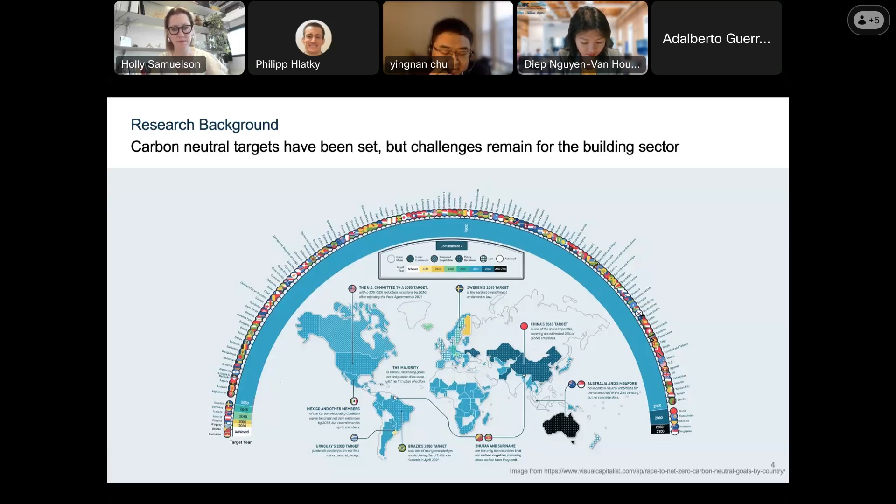Currently, most countries have already claimed carbon neutral targets towards 2050 or 2060. In the building sector, demonstration buildings achieving net zero have been seen in most countries technically, but how large amounts of buildings could work towards that remains a challenge. Edge has a lot of experience in emerging markets and understands deeply this challenge in the complex social, economic, and climatic context. So it is still worth rethinking the definition of net zero to understand how this changing concept would bring opportunities and challenges to the real world.

Different countries and cities are all trying to develop or upgrade their building standards and building codes to allow the large amount of buildings to join in this decarbonization process. So by learning the detailed how these standards are set and understanding the specific requirements within these frameworks could offer valuable insights for other countries and cities in marking the similar path.

And this analysis can be especially useful for cities just starting their decarbonization efforts, helping them better understand potential strategies and future decisions.

Another important point is that the building sector has a strong connection with the country's overall energy plan and building budgets, and the relationship between these can be quite complex.

When we plot the energy generation per capita and the grid carbon intensity, we can see from this chart, especially for these emerging market countries, some of them may have quite green grid, which is powered by hydro. But at the same time, they may not have enough energy consumption, and due to climate changes, some places even suffer electricity shortage in dry seasons.

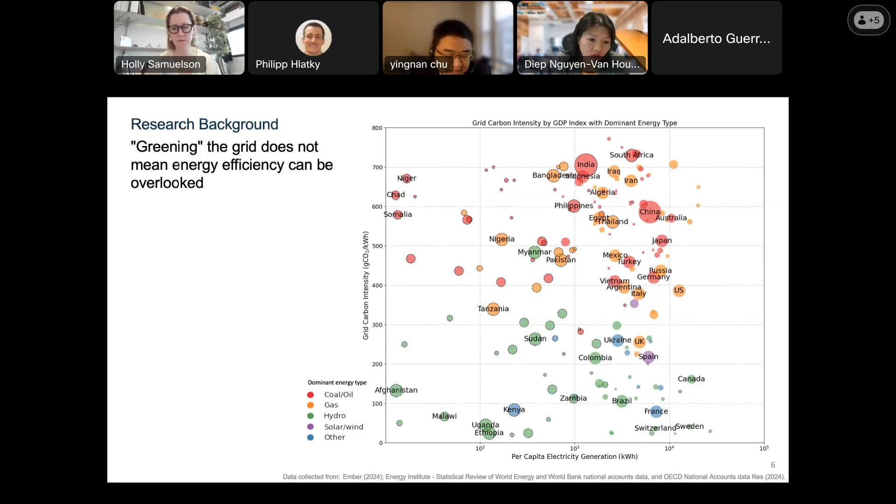And this clearly means that a cleaner grid does not necessarily mean that building energy efficiency can be ignored. The interplay between grid decarbonization and building energy use is intricate at this point.

In addition, achieving carbon neutrality involves more than just meeting targets within individual buildings. New tools and broader concepts are developing, trying to address this complexity.

For example, ISO 14068 introduced a carbon neutral aligned concept. If a sector's actual carbon is traced annually or year by year, it could allow reduction credits or a kind of reduction plan towards its final target of net zero. Within this path, it could be defined as carbon neutral aligned.

This approach expands the definition of carbon neutrality and enables broader participation, making it possible for more buildings, especially for retrofits or projects that cannot achieve the final target directly, to join the decarbonization path.

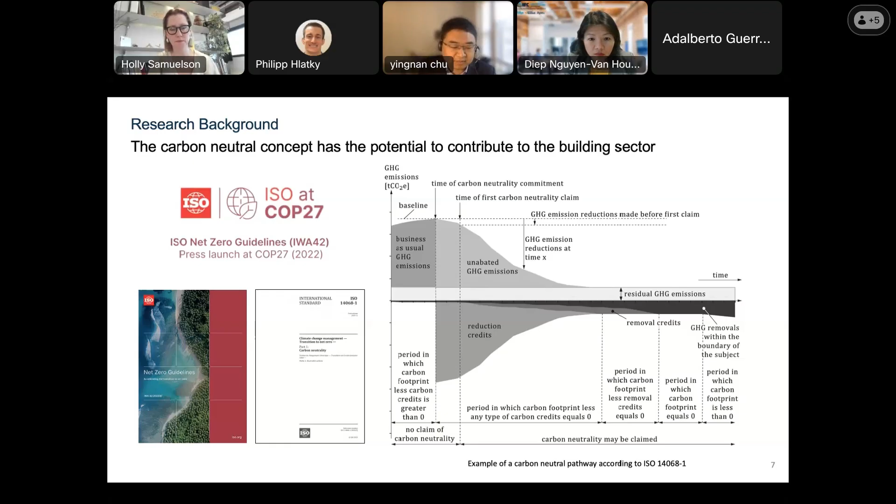So, facing this changing world, our research objective is to evaluate this definition, to analyze the trend and the concept behind this, and trying to identify the implication and opportunities for wider impact of carbon neutral targets, including the emerging markets.

Our work is divided into three parts. First, we're trying to deeply review the recently published net zero carbon related standards to understand how these principles are changing and what are the key features.

Second, we're trying to collect data from real world cities and make comparisons about these key metrics to understand how strict these targets are and how challenging they were to the emerging markets.

And third, we're trying to collect a series of interviews from experts to really understand how these changes and concepts may impact a practical situation.

The first part is about reviewing all the standards. We're trying to understand how these concepts of net zero are evolving. These are the six standards that we are mainly involved in.

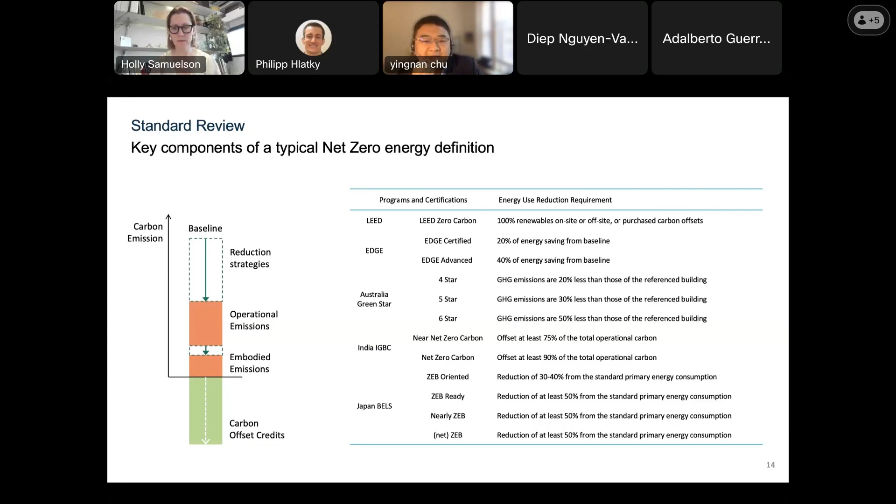But for these new standards, the first thing clearly is they set clear requirements for fossil fuel usage, which means the encouragement of electrification. For example, the US national definition and Chinese standards both mention that on-site and off-site should not use fossil fuels; the building should only be powered by clean energy. The UK standards clearly require not using fossil fuel on-site, while district heating or other off-site requirements will be managed in other related standards.

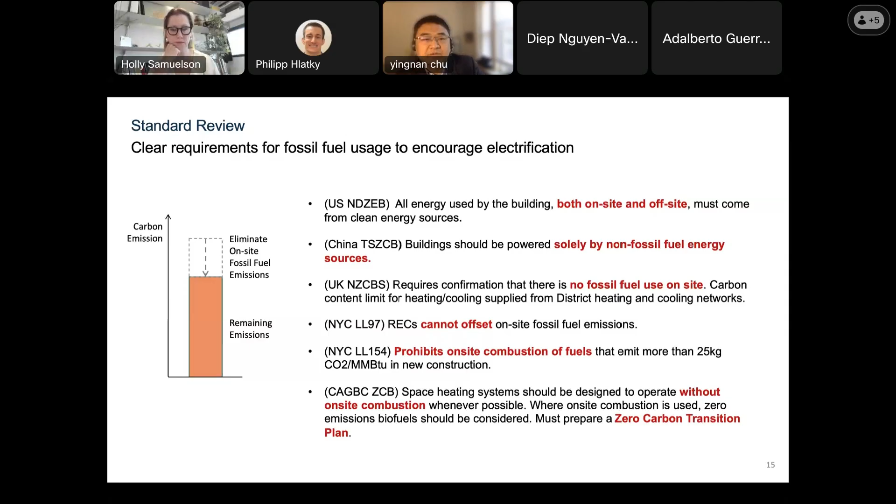Similar things go for New York City. The proposed Local Law 154 prohibits combustion-related fuel usage in the future. For the Canada standards, they also mention trying to eliminate on-site combustion, but they propose another option of a zero carbon transition plan, meaning in some cases you cannot eliminate it directly; you could make a plan to eliminate it in the future, and your actual work should be traced. So we can see from all these standards a clear trend of eliminating on-site fossil fuel emissions directly, which could define net zero carbon buildings.

The second key change is the embrace of this benchmarking approach. Clear thresholds are set based on this benchmarking approach for building energy efficiency. We can see in all 6 standards a clear metric based on different building types and different climate zones, set as the upper limit for all operational energy emissions to be followed.

There might be slight differences. The first line, these 3 standards, as discussed before, are mainly performance-based standards, meaning you have to submit your actual operational data to get certification, so these figures should only be matched with operational data. But the bottom part accepts both design and operational data separately, meaning these figures could be achieved using simulation models and simulation data, which seems to be slightly different.

Another slight difference is that ASHRAE 228 emphasizes not directly setting limits on the building's own energy; instead it sets the maximum procurement of off-site source energy, which is another way of trying to set a limit. Local Law 97 sets caps for carbon emissions, directly regulating the carbon emission of different types of buildings. So we can see all these standards clearly trying to set up clear limits or thresholds for building energy efficiency apart from other connections.

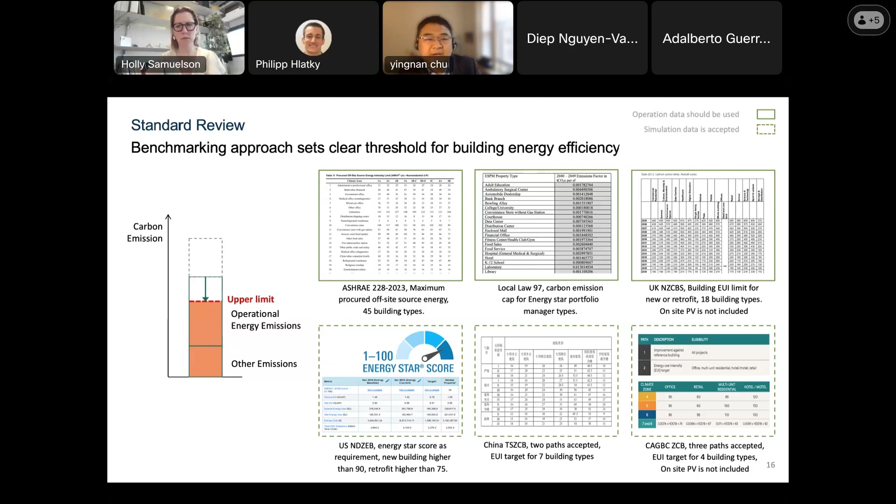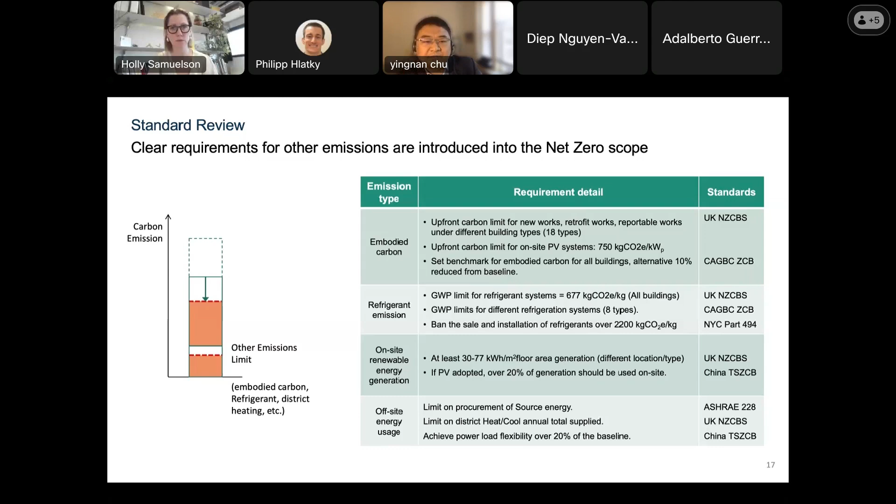As to the carbon offset credits and the renewable energy certificates, we can see there's always a discussion of how to take advantage of this and how it is useful. We can see in recently published standards, there are standards trying to control or limit the use of carbon offset credits.

For example, the U.S. national definition clearly mentions do not accept carbon offset. Similarly in the UK standards, they do accept the offset, but they understand the offset as something else, as an asset. They are not included in the basic certification framework.

Well, the New York City's Local Law 97 and ASHRAE also set limits on the maximum you can get from carbon offset. On the other hand, the importance of...

using the renewable energy certificates is addressed, and in most standards, they address that for electricity use you could use renewable energy certificates to balance the actual emission of electricity use, and also the bundled REC should be used to make sure the electricity is generated and used exactly for your project.

So when compared with our traditional understanding or the previous concept, we can see briefly the trend of this definition changing. First, of course, eliminate the direct fossil fuel use on site. Second is try to identify the performance targets to address energy efficiency separately. The third is to also include other limits for building-related emissions, maybe including embodied carbon, refrigerants, or district heating, etc. Another thing is reduce or avoid this reliance on carbon offset credits.

When we go into detail on these document settings, we can see how these documents are developed, trying to support these main changes. For example, in most of the standards, the annual operational data should be tracked in order to maintain this certification process. In order to achieve certification, you have to submit 12 months of operational data to fulfill all the requirements.

And also New York City's local law and UK's standards, and also Canada's performance-based standards, according to their requirements, the certification is only valid for 1 year, and you should update your actual performance annually to keep these standards valid.

And the UK, because the UK system included the upfront carbon sector, they also developed some methods on how to integrate this embodied carbon into the annual submitted information, and how to make the embodied carbon regulated similar to performance information of the buildings.

And based on that, we can see the importance of building identification is improved. For example, in the UK's standards and also in New York City's local law, the unique reference number of each building is addressed or targeted to make the application of the standards.

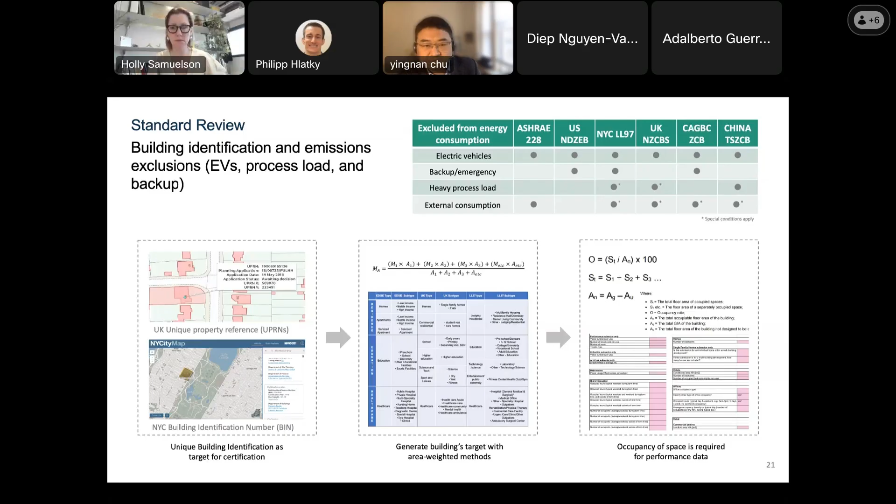And also, because all of them are carbon-related standards, they are trying to clarify how different types of energy use are converted back to the building itself, which means the responsibility behind this complicated system should be clarified. For example, in most of the standards, how the distributed energy sources should be calculated back to building, how the energy storage emission is calculated, how the combined heat and power, biofuels, energy from waste, and even hourly time of use electric emission is calculated, will be clarified.

Special mention about New York City's Local Law 97, because it is mandatory for most buildings within the city. So they have put a lot of effort into clarifying different types of energy use. For example, we can see in the bottom series diagrams proposed by the New York City local government, how different types of energy distribution systems, for example the central plant or combination with electricity load, and how different energy distribution systems in each situation calculate the energy use, and in what situations the sub-meter should be placed in order to achieve this calculation.

From the previous slides, we can feel this trying to make strict requirements on this emission, but at the same time, we could find certain levels of flexibility within these rules or requirements. They work a lot trying to allow a wide range of buildings to be aligned with this. For example, the Canada and China standards mostly contain design and performance phases.

So you can use the simulation data to fulfill the requirement, and the performance data does not need to fulfill the figure requirement—only the report is required in this situation. And there are also accepted different ways to fulfill this target, either benchmarking or energy saving percentage, or even other strategies based on their own country's building code and workflows.

As to the UK standard, you can see in the details that they are trying to exclude certain types of room. For example, they mentioned that currently certain building types have the district heating and cooling requirement excluded because of the lack of data.

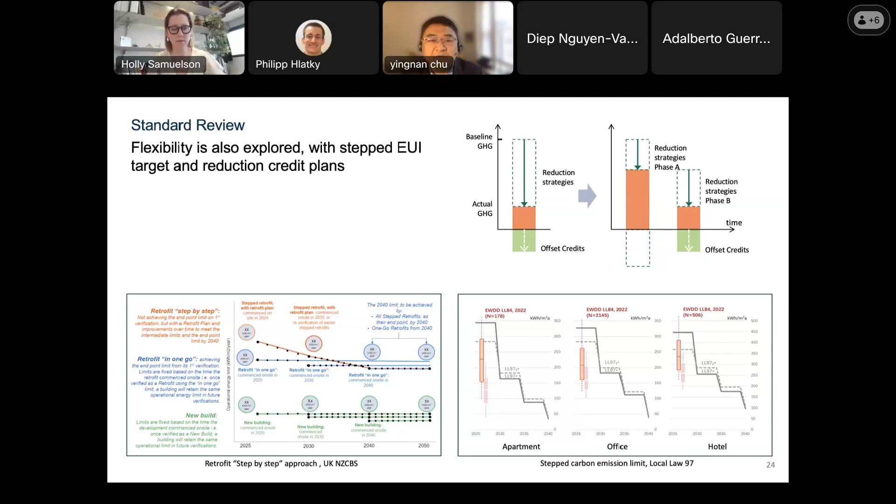After reviewing all this information, we could feel on one hand these standards are getting strict. Multiple pass and fail requirements are set on emissions, apart from the traditional carbon balance of emission and carbon offset. Also the performance metric is tracked annually with benchmarking to make sure the actual emission of the building will not exceed a certain level. At the same time, they're trying to make more flexibility, for example accepting certain types of energy consumption in special contexts, and creating a step-by-step pathway to conduct retrofits. So we could somehow feel this trend of how to achieve balance between this new concept, trying to balance within the benchmark context to manage all types of emissions and gain a new balance within these new definitions.

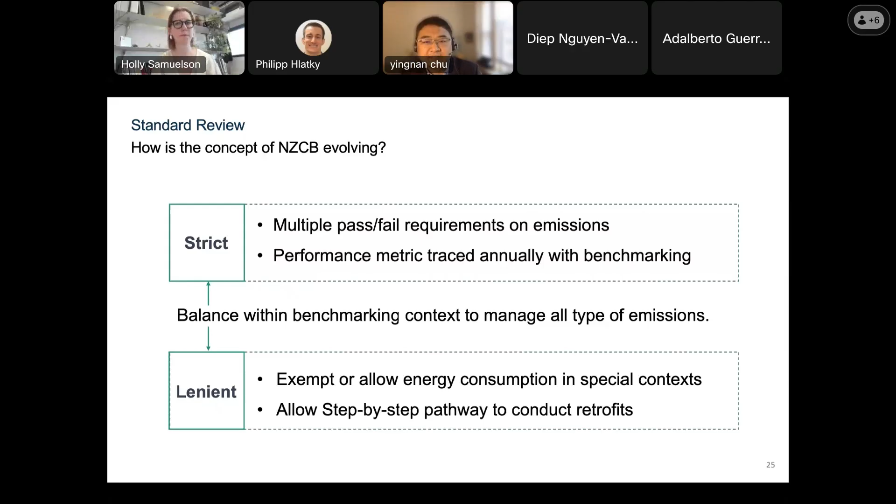The second part is about metric comparison, because clearly the performance-based target, or building energy efficiency, is the key figure required for buildings according to this effort. So we are trying to understand how these figures are set and how they may impact the actual building in the actual situation.

We're trying to collect data from different cities. For US, Canada, or even UK cities, we could use publicly available city-scale building datasets to plot the actual building energy use of different cities. But for emerging markets, there's currently not enough city-scale data, so we try to collect information from government reports and research papers to demonstrate their basic distribution of these different energies.

We also have a chance to collaborate with EDGE. We could use the EDGE system because EDGE provides a series of calculation systems for most cities within the world, and within its own cities these targets have already been normalized and have a certain level of comparison. So we are trying, based on the ASHRAE target, to make a comparison of different cities to understand basically how these impacts are.

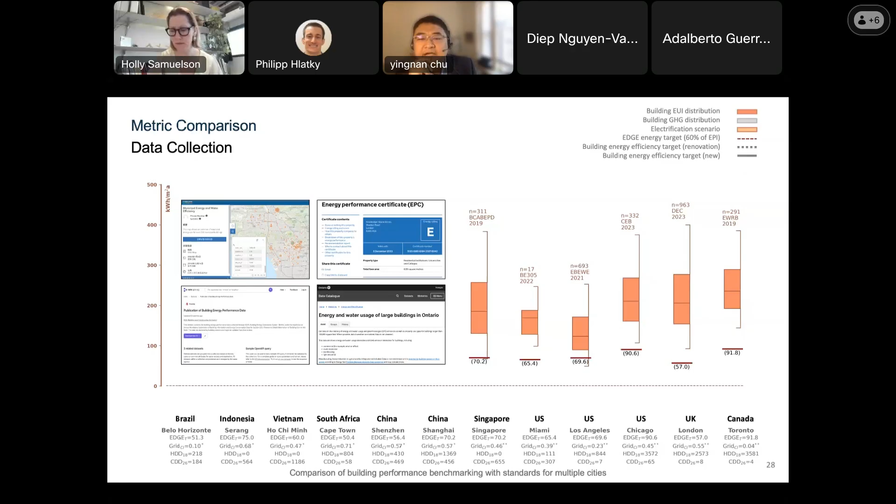For the US and UK cities, we could download directly the information of each unique individual building and plot them directly in this chart of operational energy use. For example, this chart shows office buildings for each city, and the dark red line here is the EDGE energy target, which is 60% of the baseline case.

For the emerging markets, we're trying to collect information from public government reports or research papers to also make a basic comparison of these standards. Currently we collect data from Vietnam, South Africa, Indonesia, etc.

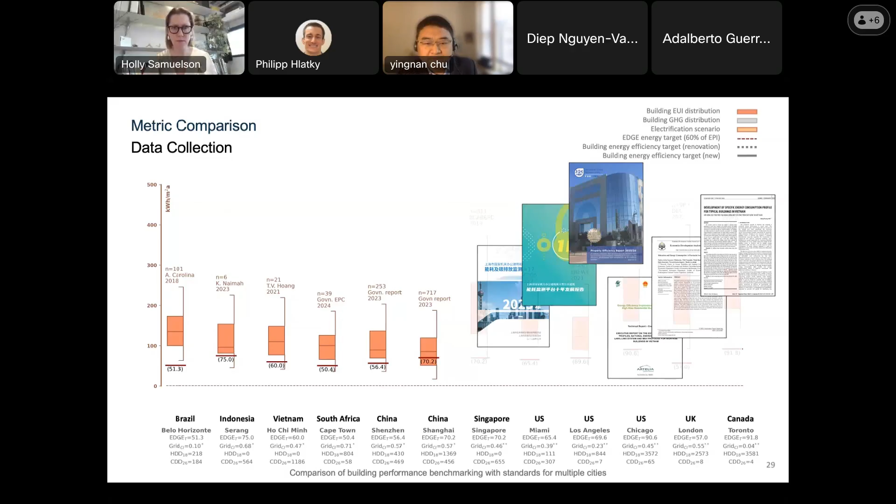So when we plot all these 12 cities together, we could somehow start this comparison and understanding of how these standards are required. We'll try to use the EDGE target to make an alignment—you can see this dotted line. If we align all the EDGE targets directly, we could compare each city's energy distribution, whether it's higher or lower than EDGE, and what the trend or difference is compared to this target.

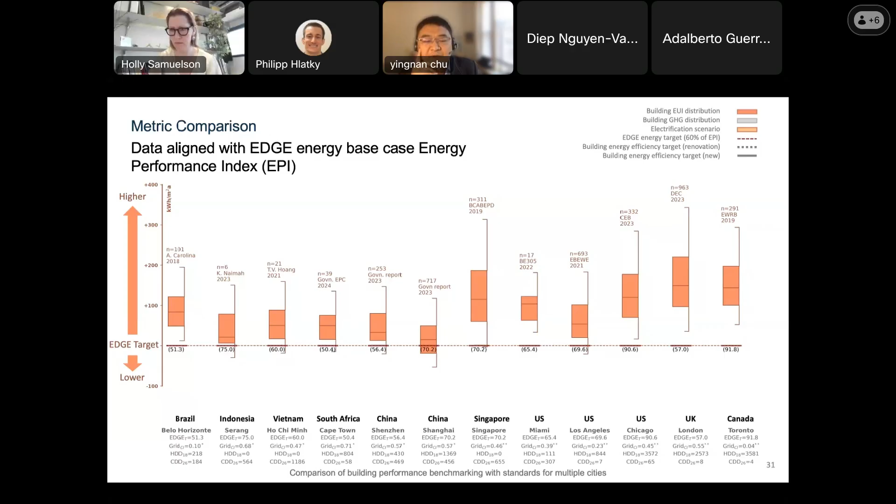For example, in the Brazil situation, most of the city is about 80 kilowatt hours higher than the EDGE target. While in the Shanghai situation, maybe 20% of the buildings currently perform lower than the EDGE target, 20 kilowatt hours lower than the project. This comparison may not be precise between countries, but considering the baseline has an alignment of climate and behavior, we could have a basic comparison to understand the connection between the simulation data and the real world distribution as a concept.

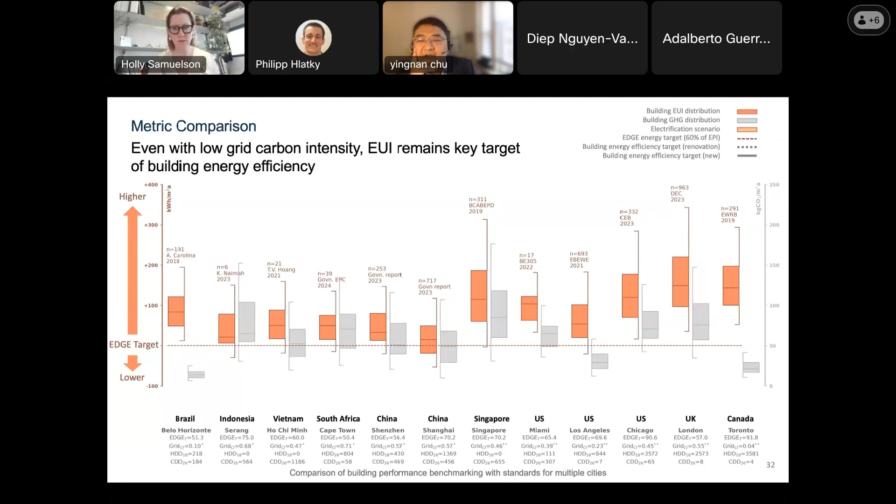When we plot the carbon emission information of this situation, we could clearly see that, for example, in the Brazil or Canada situation, or even Los Angeles, they may have a green grid, so their actual carbon emission from building operational energy is quite low compared to others. But again, as discussed before, the requirement for building efficiency is focused on energy use intensity or energy use itself. So no matter how green the grid is, the building's own efficiency should be addressed at this time.

So within this framework, we plot different standards' requirements on the same chart. Again, this is the office building category.

Briefly, for example, the UK system, you can see there's a diagonal slope. They set different requirements for operational buildings based on different years, which means currently they have a relatively higher level of requirement, but in the future, about 2050, the requirement of actual emission is quite strict. They set up this metric to guide their own country's decarbonization process.

Chinese standard also proposed a benchmark, but they separately propose a large office and a small office, so there are two requirements for new buildings in the office sector.

South Africa currently does not publish a national government level clearly defined target for net zero building definition, but we could see some government-based supported reports that discuss how strict or what the energy efficiency should be. So currently we reference a report, Getting to Zero 2020 guide, to see their vision and understanding of this EUI.

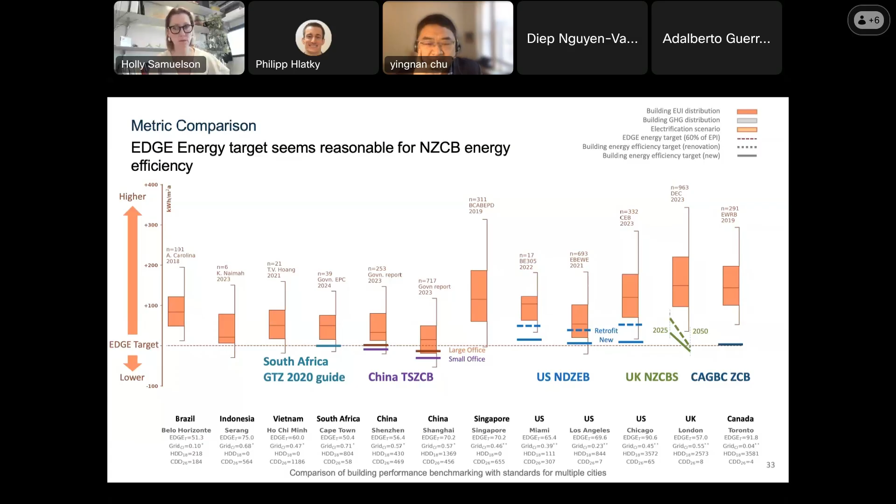We go into detailed comparison of this, because most of the standards address the importance of electrification. When we calculate the electrification scenario of different cities, we can see clearly how these targets are set related to the existing buildings.

Electrification process may lead to a reduction of the energy use intensity, which may reduce the strictness of achieving this target. And also at the same time, different standards may have different regulations on how to calculate this energy use intensity.

For example, in the Canada and UK situation, and even South Africa's report, the on-site PV is excluded from calculating this emission. Well, in the US standards and also Chinese standards, the on-site PV is included. So this means for different types of office buildings, they have different types of challenges.

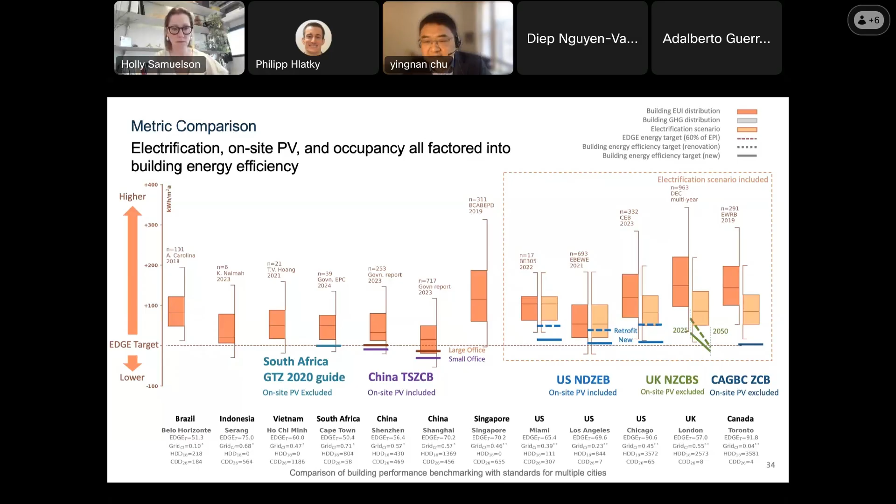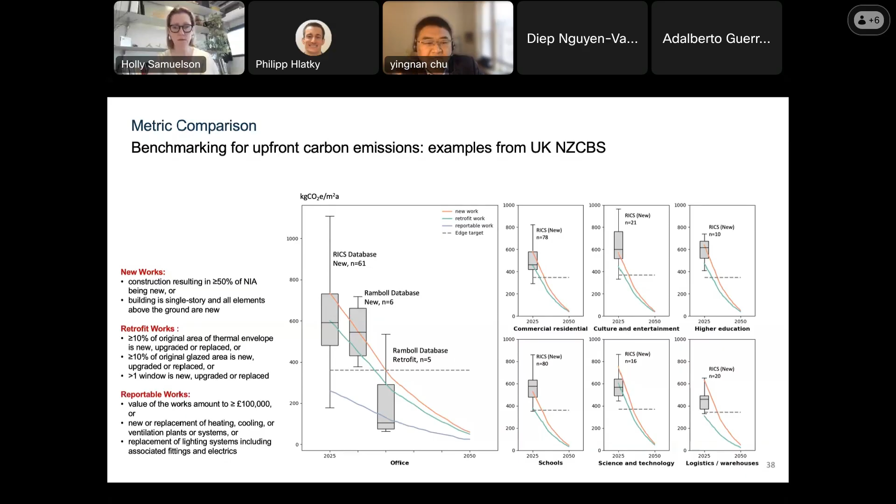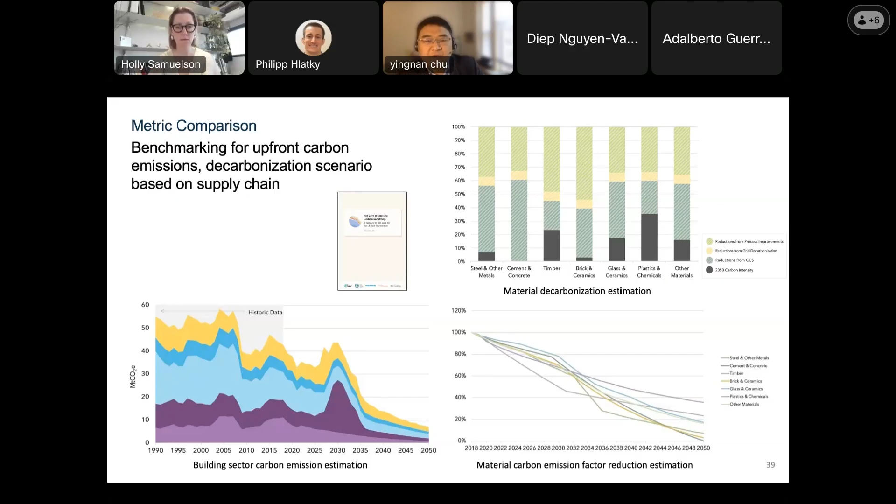When we go into detail reading this decarbonization roadmap, we could somehow understand how they are expecting a strong relationship between this embodied carbon decarbonization process and the supply chain. In the left chart, you can see the estimation of future renovation projects around 2030, and maybe lower construction after that. But in the right chart, you can see the estimation of different parts of materials and how they could achieve decarbonization in the future. So it means there's a strong connection with the supply chain in this sense.

After going through all these figures, we could realize the simulation target, benchmark metrics, and performance behavior present a really complicated situation with connections between each other. For office buildings, the EDGE energy target could be used or seen as a reasonable target to define energy efficiency for net zero energy buildings, even toward the future. But at the same time, for hotels or others, performance-based targets would have more advantages because they have a better connection with the real world situation.

At the same time, emerging markets tend to have lower energy use intensity, but it does not always mean higher efficiency. Because we can see across different types, there's a detailed relationship with how the building type is divided and how the area is calculated. So this means benchmarking and performance targets should be examined in detail, case by case, in different sectors.

Also, embodied carbon benchmarking is currently practicable and possible, and addressing the reduction strategies seems to greatly depend on the supply chain.

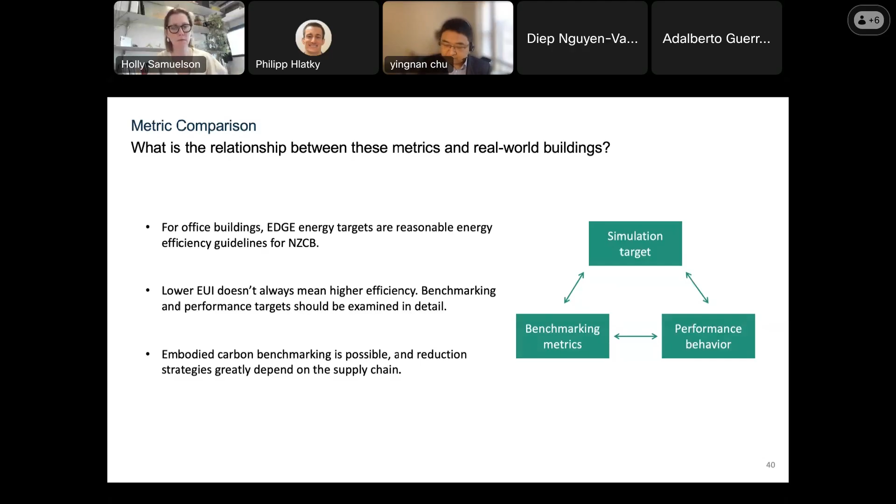The third part is we're trying to conduct a series of interviews with experts, to understand better how these changes and concepts will impact practical situations. Thanks to EDGE's global think tank, we have a chance to connect with experts from both emerging markets and China. Currently we have conducted interviews including Vietnam, India, Colombia, and others, over 13 experts. It is an ongoing interview process.

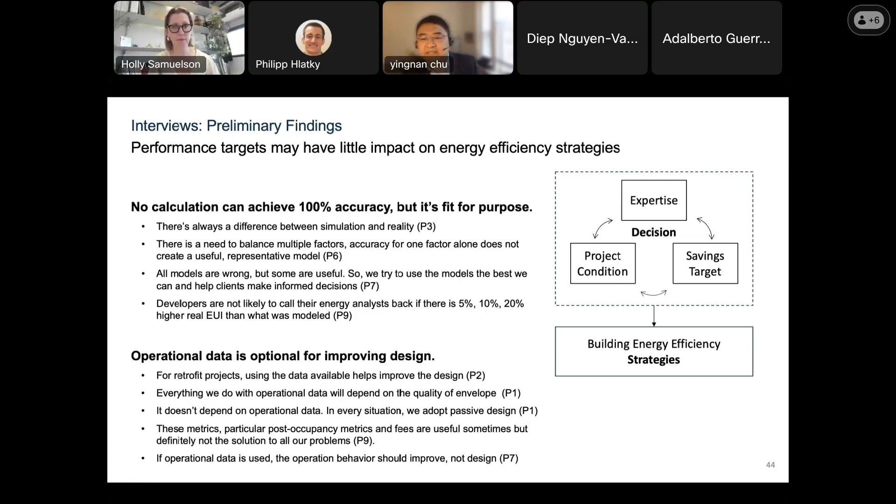The operational data could be used to improve the simulation and other tools, but not radically change the decision-making process. But after detailed analysis of this discussion, we realized the performance data really try to define or expand our understanding of energy efficiency, because they have a better connection with the actual performance of the building. In terms of EUI or related figures, it's easier to make comparisons. So during the whole design and construction process, the target itself is more clear for all sectors related to the building.

At the same time, it raises another consideration of how to take advantage of this performance information. Experts mentioned that if we have a better understanding of the uniqueness of performance behavior, we could select better or more suitable energy efficiency strategies designed for this specific pattern of use. In this case, it really expands building energy efficiency to a performance level.

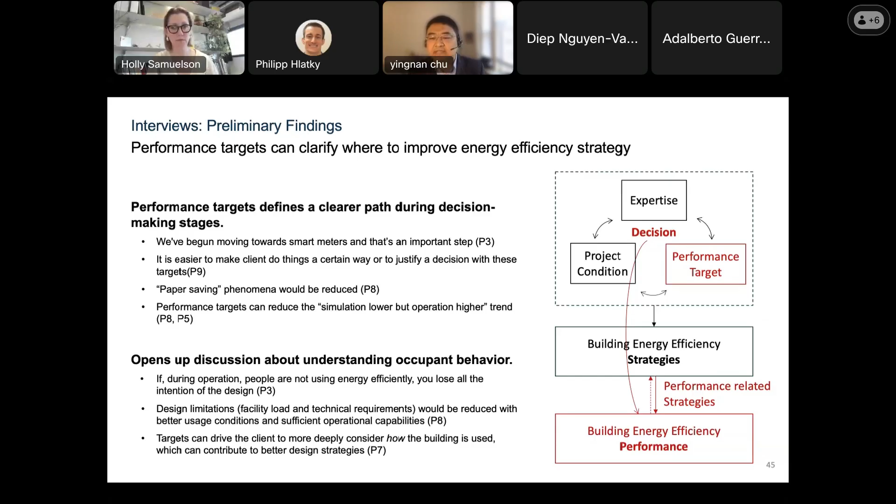As to the pathway concept or step-by-step concept, currently the concept itself sounds good. Most experts mentioned that for emerging markets, most projects cannot achieve all the decarbonization strategies at once. So if there's a pathway or a chance to make different plans, it will be much easier for them to follow. But it also addresses the importance of ownership, because the plan makes a strong connection between current use and what the future pathway is. So the ownership or responsibility behind that is also addressed.

Technically, we realized how to take advantage of this concept is really a case-by-case situation. For example, in our discussion, there are cases where similar clients face different situations. They have to figure out different strategies to take advantage of this step, either floor by floor or facade by changes. So it really depends on how this concept is understood and how it could be combined in the real world situation.

As to embodied carbon, currently emerging markets do not have enough data to open the discussion of embodied carbon. So at some point, detailed connection with the supplying industry to open up discussion about embodied carbon seems important to start this process. At the same time, we realize in project decisions, embodied carbon tends to not be set at the first level of priority. So how to integrate this embodied carbon reduction strategy into the overall decision-making process will be beneficial to make real progress of reduction.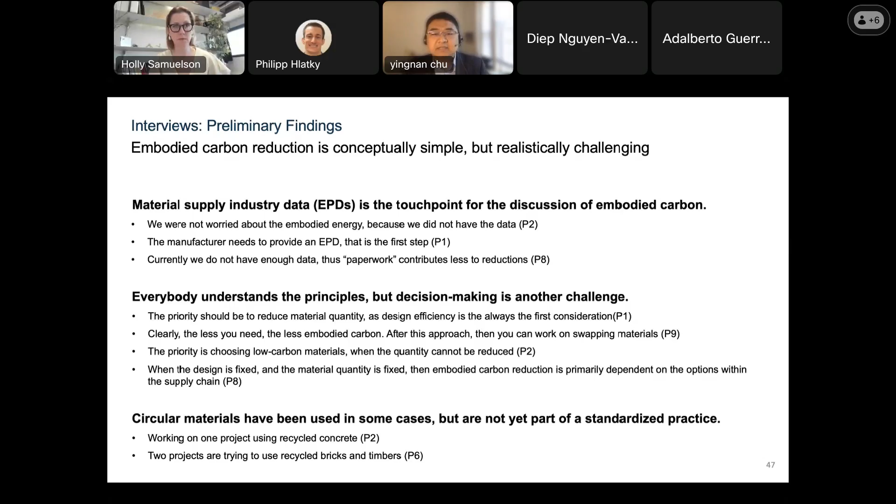So clearly, during these interviews, we felt the practical situation is quite complicated and case by case. So in that sense, how the knowledge is converted to the situation is quite important. Traditionally, we may have a lot of knowledge on how to conduct carbon reduction design or strategies to fit different cases, but we still need knowledge beyond the technology.

For example, how to confirm the performance-based target, how to normalize the unique context of uncertainty and variability of operational data. Also, operational EUI tends to be lower in these emerging markets. How to take advantage of this unique behavioral advantage and convert it back into design strategies is also something to be thought about. Similar things apply to the step-by-step reduction method.

The concept itself is promising, but how it can work properly should also be operating on a case-by-case basis. And at this time, the knowledge may impact a lot on this situation.

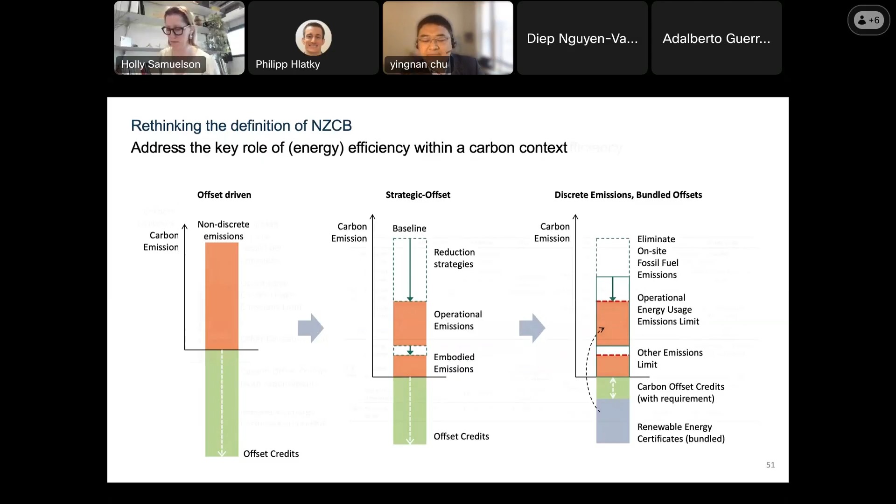Related with that, we realized that we really need a better connection with the real operational behavior. So how to better understand or take advantage of this unique behavior also raises a question to our understanding of energy efficiency. In this case, holistic thinking will be important and will be addressed in order to achieve a whole life cycle for buildings' carbon energy efficiency.

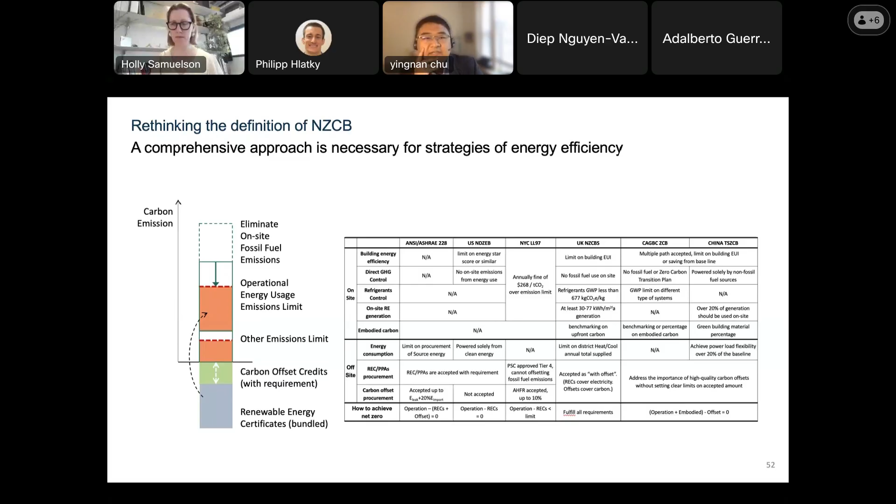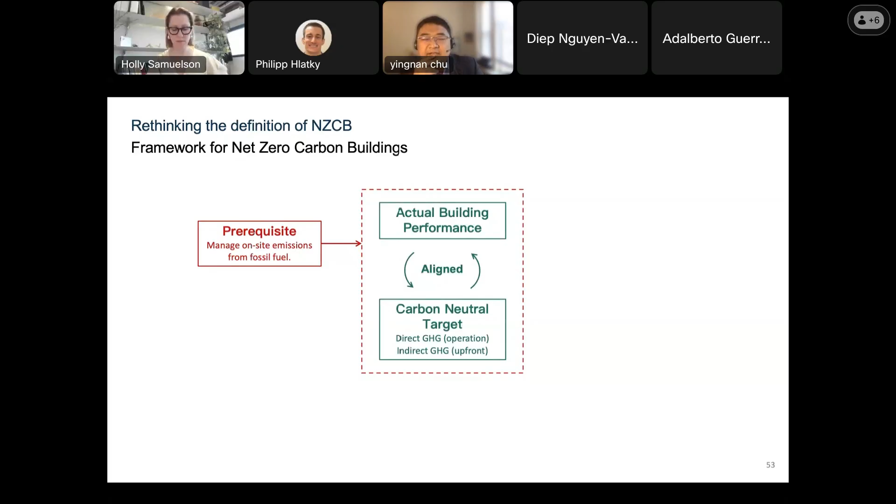So finally, we are trying to conclude these trends within the framework to understand what the trend of net zero may impact. Clearly, the first is the prerequisite: the building has to manage all different types of fossil fuel emissions, either eliminated on-site or eliminated totally. Also, the building's actual performance will be traced and aligned to a certain target, and the actual performance will be traced annually to make sure it works properly. And also, constraints may be used when strategies are adopted, maybe constraints on energy efficiency or requirements on maximum procurement in order to upgrade or improve the reduction or removal credits that make the reduction of the actual building.

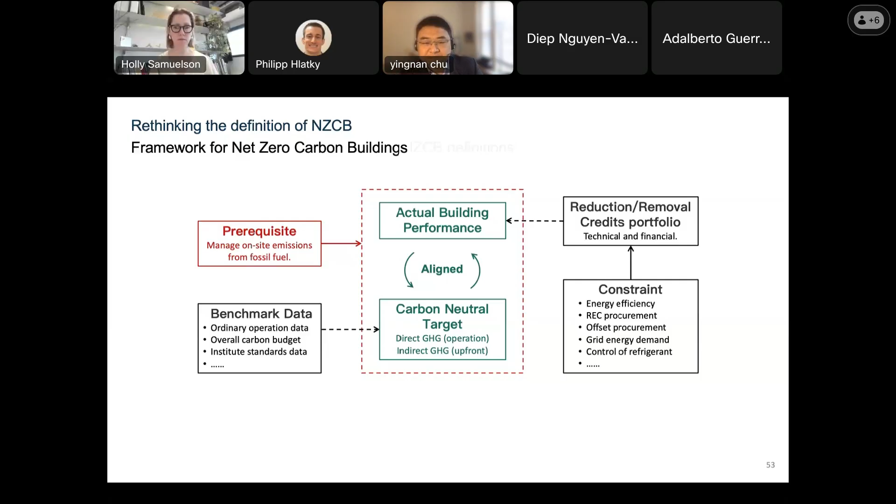So in a sense, we could open the discussion about this opportunity for emerging markets under these definitions. Although we understand for emerging markets it's very challenging in the real situation to achieve the overall target, but upon these definitions and discussions, we realize there are some unique opportunities.

For example, first is electrification. Emerging markets are still under urbanization process. So when compared with others, like the US, they may have fewer technical challenges on this overall electrification and adopting different technologies.

Well, attitudes towards the actual performance - emerging markets tend to have lower operational data. So it seems to be a unique advantage for them in this long path towards carbon neutral, and how they could positively take advantage of that to address their own unique energy efficiency would be valuable for emerging markets. Also, in the selection of strategies or credits, emerging markets have already collected rich knowledge on passive design strategies and cost-effective measures. So better operational use of these strategies in a unique situation would be another opportunity or benefit.

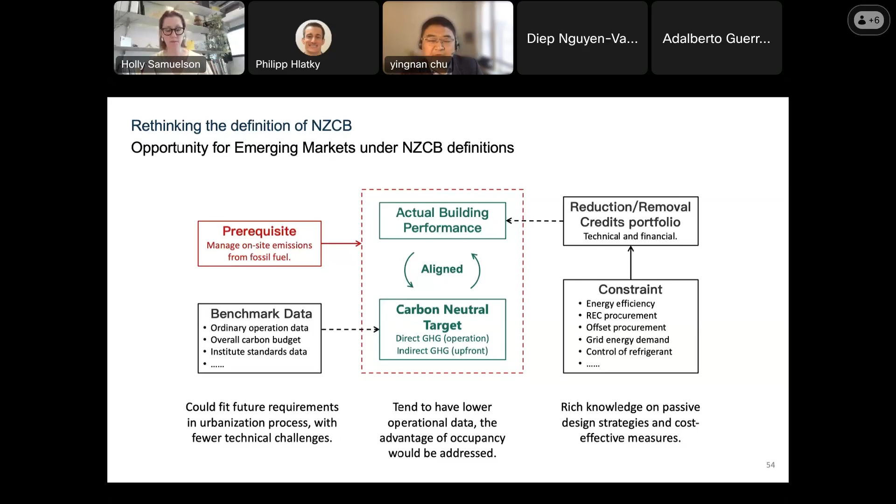So behind all this, the important thing is knowledge, and the knowledge beyond what we traditionally understand as technology. Maybe the knowledge of how to understand this performance behavior or occupancy, how to take advantage of this behavior, how to negotiate with the real-world situation - taking advantage of this new concept is important to achieve it.

Okay, thank you. Thank you.